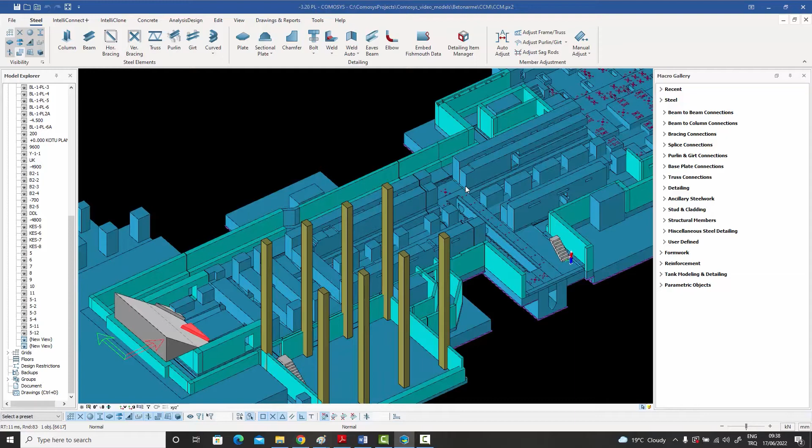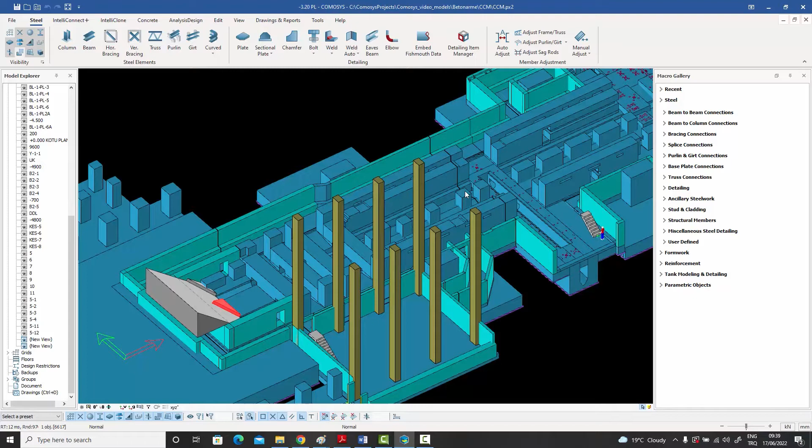This video is about an automatic dimensioning feature in COMOSYS for formwork or concrete structures. We have several commands for automatic dimensioning, but this particular command is for a controlled mechanism in which the user decides where the dimension lines will be.

Here I've created a plan view of the model with certain up-down limits, and my purpose is to create the formwork dimensions. We can create dimensions of all points in one go, but often we don't want that kind of automated dimensioning, because the people at the site might prefer the dimensioning done differently. There's a command in COMOSYS in the dimensions menu called formwork dimension along a line.

This command is useful because the user decides on a line along which they want the dimensioning to take place. The good thing is that this is not a one-time creation of dimensions. It becomes an automatic creation of dimensions every time the drawing is updated or reopened. Even if you go around and make changes in the model, when you come back into the drawing, the dimensions will be updated along the lines you had defined previously.

Under the edit menu, we have lots of different commands, but on the right hand side we have commands for creating points and shapes. Under the shapes menu, we can create lines, zigzag lines, polygons, rectangles, circles, ellipses, and elliptic arcs, for instance. What we need for this particular command is the ability to create these lines in the drawings.

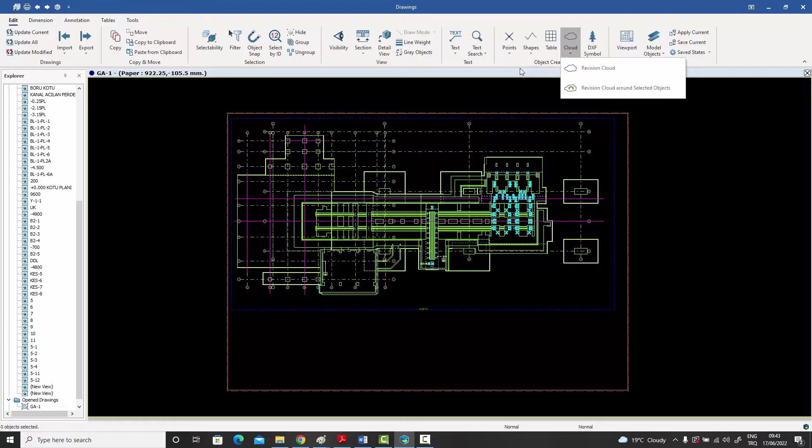But within this viewport, you can also create dimensions which don't come from the model, or write text, or make annotations which don't come from the model. Similarly, you can create shapes, or even a cloud, which don't come from the model. So there are two types of objects on the drawing side: model side objects and drawing side objects. These shapes I'm talking about are drawing side objects.

You can go ahead and create as many as you want, whether inside the viewports or outside. But right now we'll be talking about this line object. So let me go ahead and click that. This line, as can be understood intuitively, will ask us for two points.

If we can snap onto any two points, we can create a line. But if we want to snap to a free point somewhere, we need to press the Alt key, and then it snaps to that free point. Then let's say we want to snap to another free point, but ensure the line is horizontal and not slightly inclined. If you want a horizontal line, press the Control key. If you want a vertical line, press the Shift key.

Otherwise, you can just click anywhere and the line will be inclined depending on what points you choose. But if you want to ensure that even if you snap slightly incorrectly, the line is exactly horizontal, press the Control key. And if you want to create a vertical line, press the Shift key.

Right now, since I want a horizontal line, I need to press the Control key and the Alt key, because I'm going to snap to any arbitrary point, not a snappable point. So let's say I snap somewhere over here. I'll press the Control key and the Alt key, and if I click over here, automatically my line will be dropped to that point.

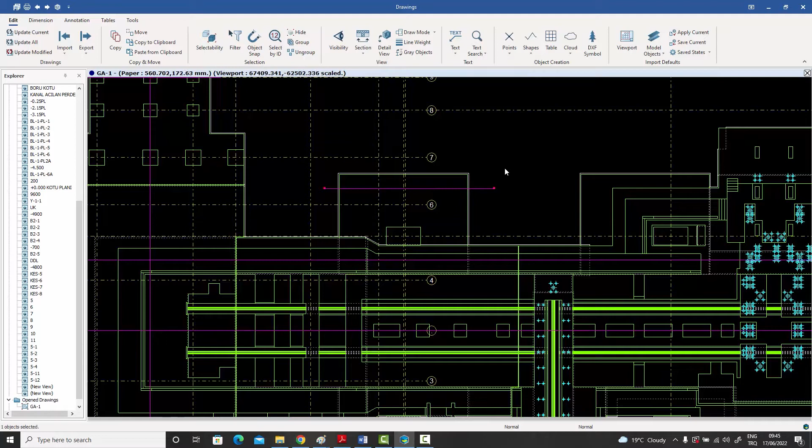I can continue selecting more points, but right now I'm just going to right click, and when I do, this line appears. You can double click on this line and give it start and end offsets if you want. You can change the colors, the line styles, etc.

I've already created a few lines before opening up this drawing for you. Some lines over here, some lines over here, some lines over here.

What you can also do is copy these lines around. So if I select this line and just start dragging it, it's going to basically move it. But if I select it and press the Control key down while dragging it, then it's going to actually make a copy of that line. So I can keep the control key pressed and drag it down and make a copy of that.

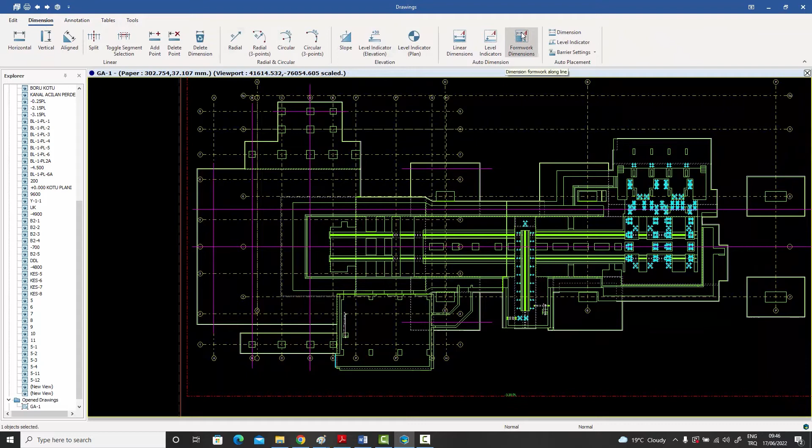Now, the command which I want to show you is in the dimensions menu, and this is the one over here. What this will do is dimension the formwork along a line. So how does this command work? Well, it works very simply. All you need to do is select the lines which you want to dimension.

I can press control and keep selecting all the lines which I want to dimension. So I'm going to select this one, this one, this one over here. Also these two horizontal lines which are going all throughout the structure all the way till the end. And let's say this line as well.

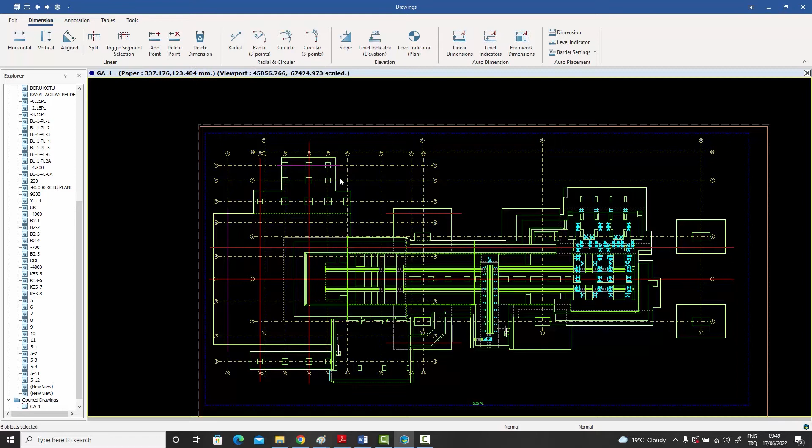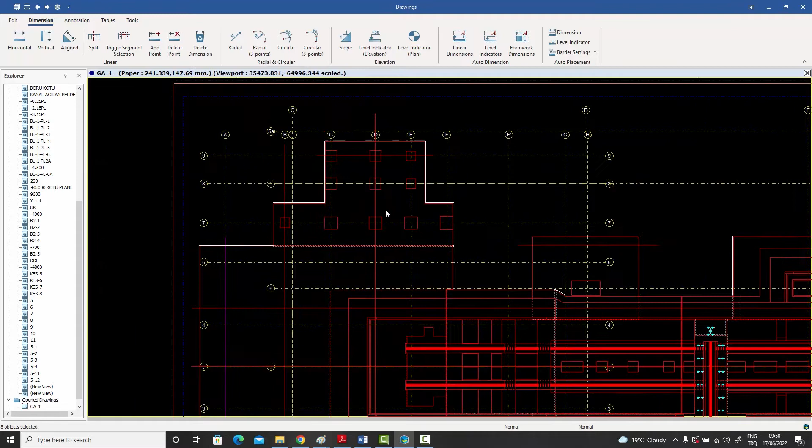After having selected my lines, I also need to select the formwork object which needs to be dimensioned. Right now this has been unioned, this entire thing has been unioned. Although on the model side these are all separate objects, on the drawing side they have been unioned into one object. So I'm going to select this formwork object as well, and as you can see, the whole thing lights up. The entire structure lights up, which has been unioned on this side.

After having selected my lines and my formwork, I basically just press this button, which is the dimension formwork along a line button. And when I do that, it creates these dimensions.

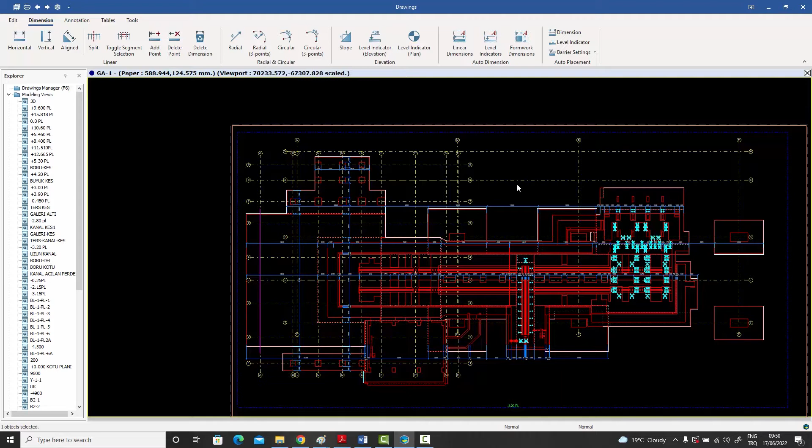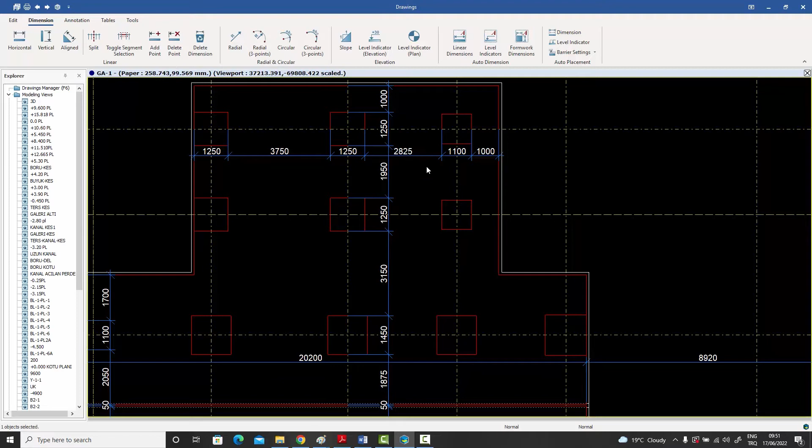The first thing it does is delete the lines which we selected, because those were temporary objects. Instead of those lines, it will go in there and create an intersection of that line with the formwork object wherever it intersects. So this one was going through this over here, so it intersected at this point, at this point, at this point, at this point over here. It basically creates all the dimensions we want along that line.

The good thing about this command is that these are not just dummy dimensions which have been created, but these dimensions will now update as you modify the model. The reason how that happens is if you go inside and see the macro, you see that there's a formwork dimension macro inside right now.

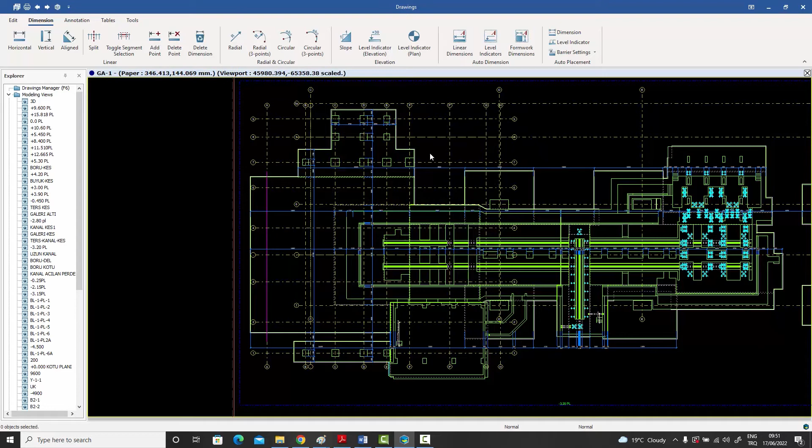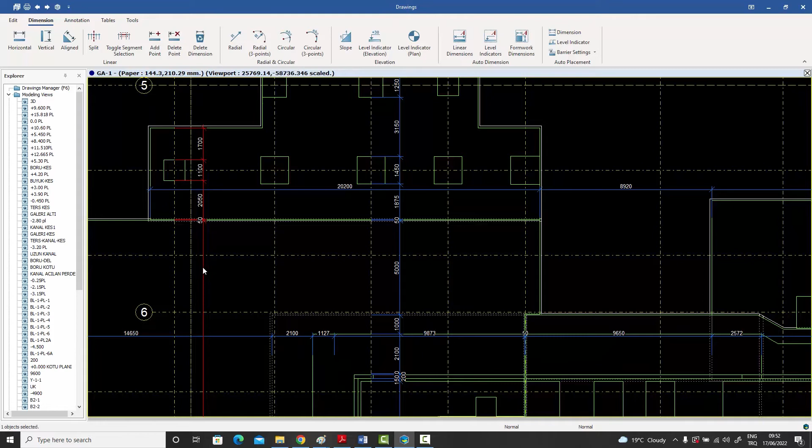This macro will now run every time this model is opened. It has saved away those lines in its memory, and every time you open this drawing, it will recreate these dimensions intelligently. So let's say if I were to go back into my model and create another pillar over here, then this dimension, which was running along that line, will now include those new dimensions as well. If I make a new hole over here, for example, then this dimension will include the dimensions of that hole as well.

This is a very powerful way of working, the advantage of this command is that you set up the whole thing yourself. You decide the dimensioning rules, where and how you want this complicated concrete formwork block to be dimensioned. Once you've made those decisions by inserting lines at different points, you just select those lines and the formwork, press this button, and the dimensions are created for you. The beauty of this is that it will keep updating.

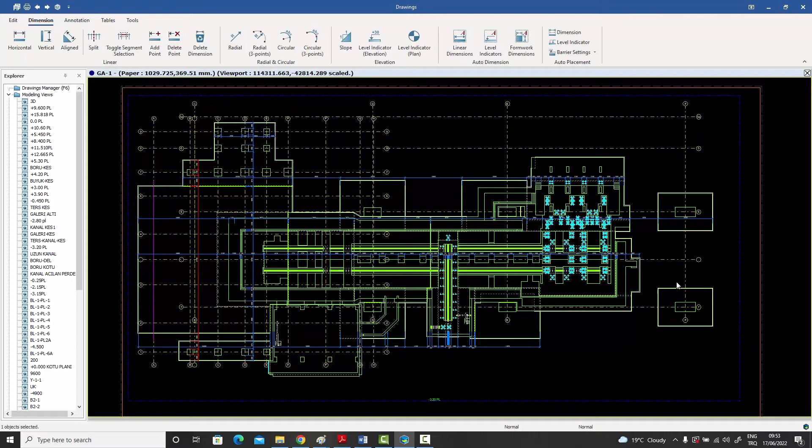If I were to go in and create a horizontal dimension myself manually, like that, this dimension is just a dummy dimension. It won't be updated if anything happens to this model. Let's say I create an indentation or a cut over here. The next time I open this, you won't see the dimensions of the cut, you'll need to add those points yourself. Or if the cut moves to a new location, the dimension will still show the old location.

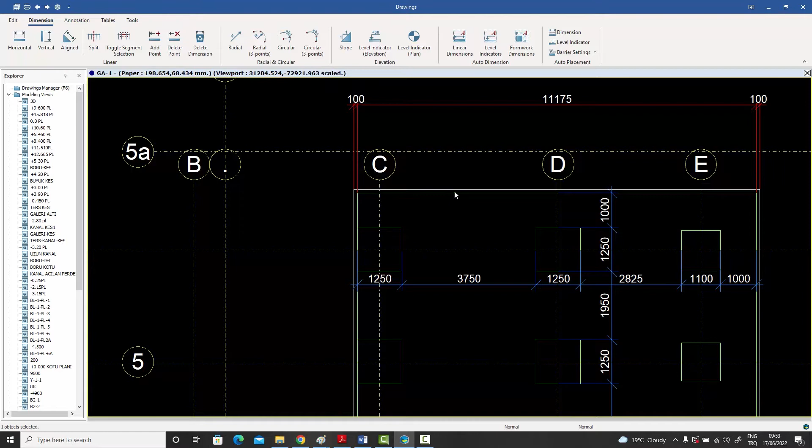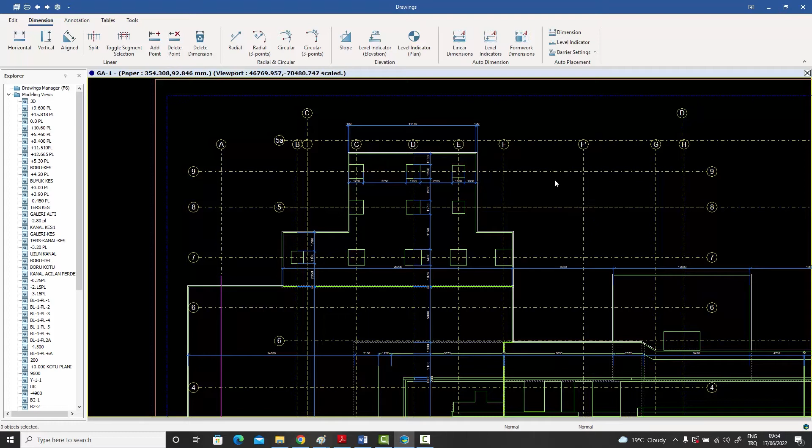But if you create those dimensions using the formwork dimensioning along a line command, that becomes a different story, because it gets turned into a macro along that line. The advantage is that if you create a new cut, move an existing cut, or add a column or beam that modifies dimensions along that line, every time you open the drawing, your drawing will update automatically.

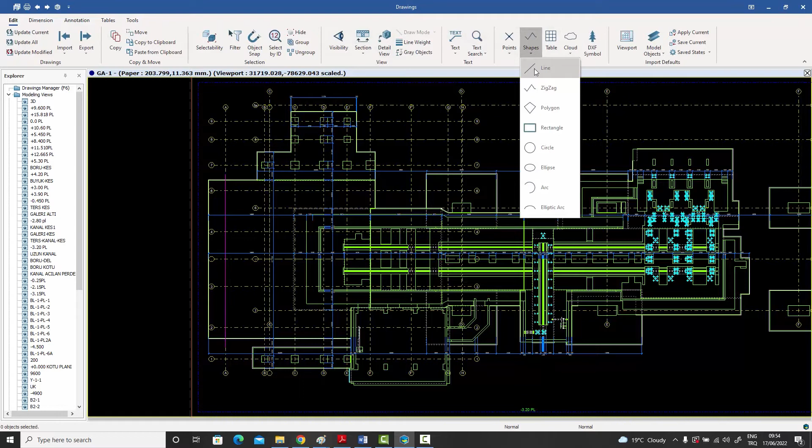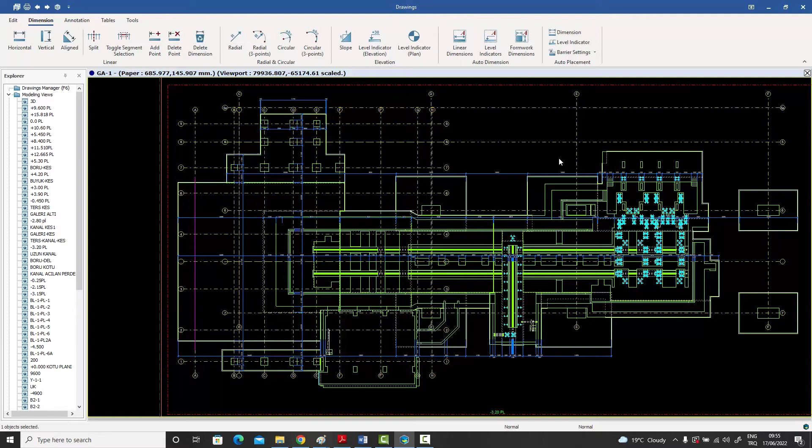It's highly recommended that when doing complicated concrete work like this, instead of creating dimensions manually by hand, you always go to your edit menu, your shapes, create all these lines along your formwork, then select them along with your formwork object, go to your dimensions menu, and press this button - now your drawing will start behaving intelligently. This is a very powerful command everybody should use in COMOSYS, and it will really quicken your concrete formwork general arrangement drawing work.

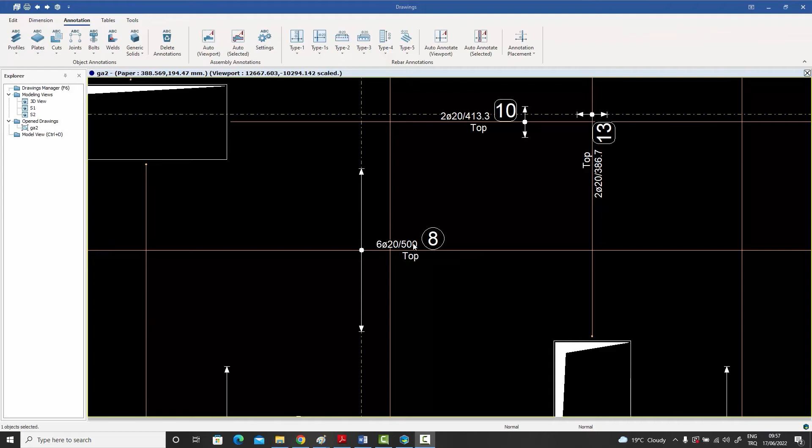Now this command which automatically dimensions formwork along a line has another interesting feature I want to talk about. Over here I have some rebars in this plan view, and this is the way you'd normally go about dimensioning or annotating the rebars - showing the range, the number of rebars, their diameters and spacings. But sometimes in certain projects with particular requirements, they want the dimension of each and every rebar given in a different way, one by one.

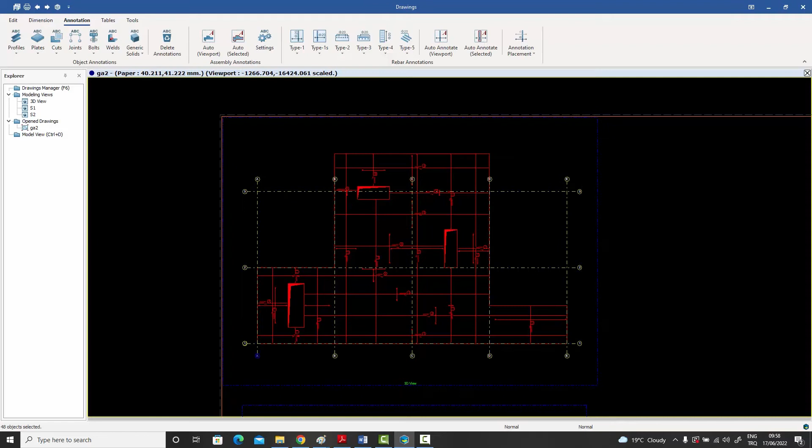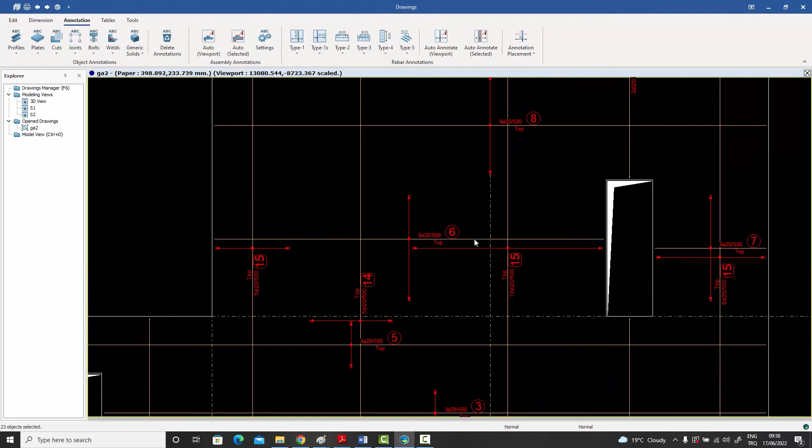So to do that, let's first delete these existing annotations of the rebars. All I need to do is select everything and press enter. This is on-the-fly filtering, which is extremely powerful in COMOSYS - look at these objects, I'm looking for the text objects. When I select the text objects, it says your text objects are all rebar annotations, so let me double click on them. As you can see, the rebar annotations have been selected from among this jungle of everything else, and I press delete - it comes back to its original shape, the way it was imported from the model.

Now let's see how we can use the dimension the formwork along a line command to help us with dimensioning both the formwork as well as the rebars. So let's create our lines first.

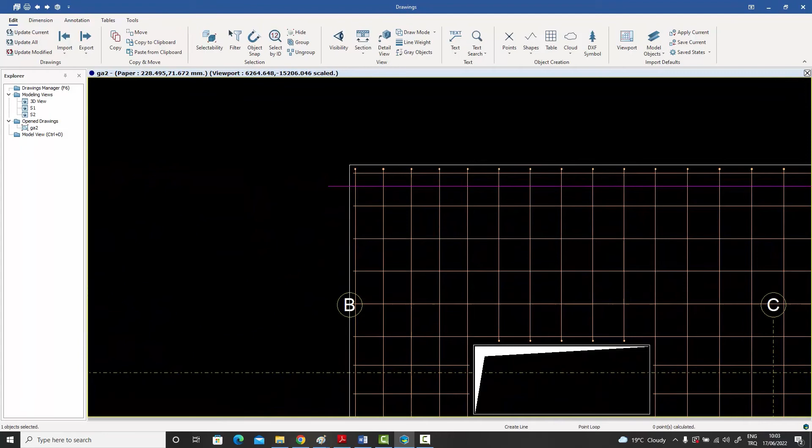Let me go to my shape and lines, and let me zoom in, and press the Alt key to snap to any free point. Go to the other side, press Control and Alt to ensure it's a horizontal line, and leave that. Then I can press the Alt key over here and go all the way down. Now press Shift and Alt to ensure it's a vertical line, and leave that. Similarly, press the Alt key over here and press Control. Let's go to the other side, press Control Alt to ensure it's a horizontal line, and leave it like that.

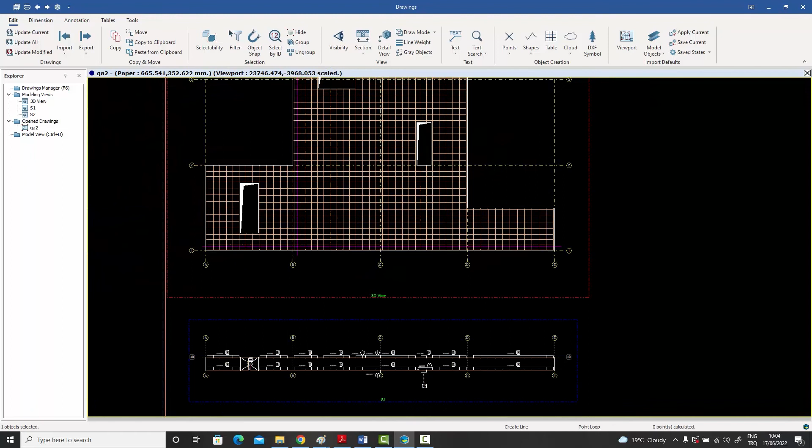I've created 3 lines, and let me now select the whole thing, because I want to select the formwork as well as the lines as well as the rebars, wherever these lines are intersecting with the rebars. I've just created 3. I could have created more depending on my need.

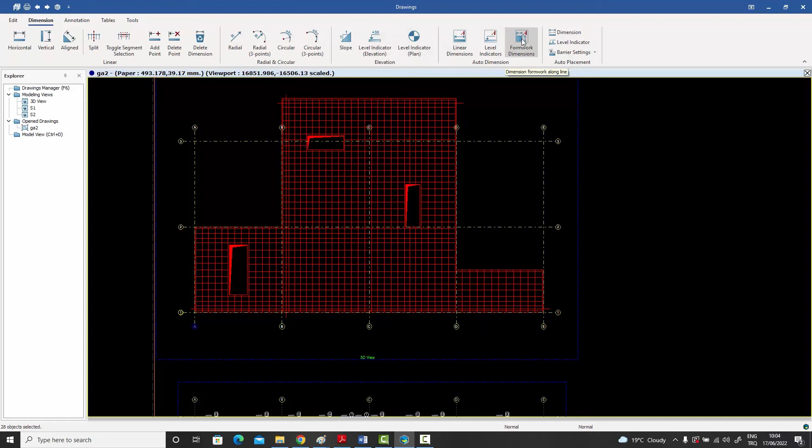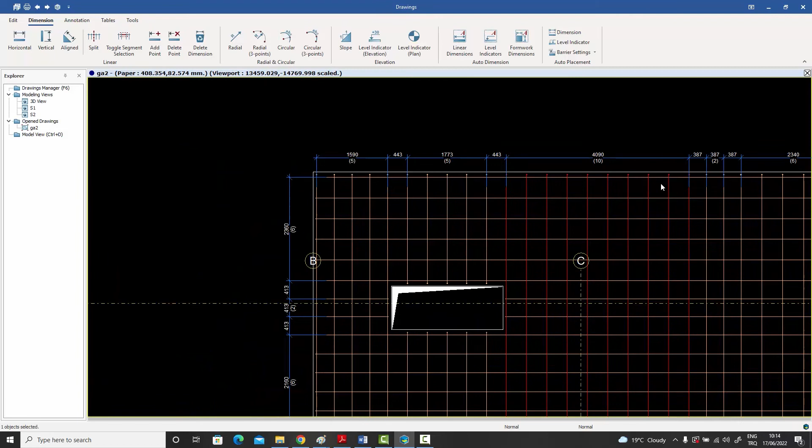Now I'm going to go to my dimension menu, get back to this one, and just press it. When we do that, let's zoom in, we will see that it has dimensioned the rebars very intelligently. So this was the first group over here, then there's another one from here to here, another from here to here, then another from here with 2 bars, and then this last piece of 6 bars.

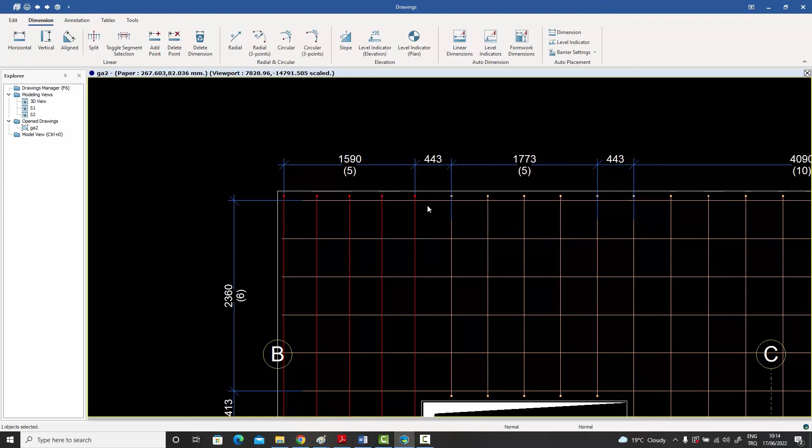So what it has done is it has dimensioned these first 5 bars. It's written that the number is 5, and the distance from this end to this end is 1590. Then there is a gap of 443, and then there's another 5 bars with a total distance of 1773.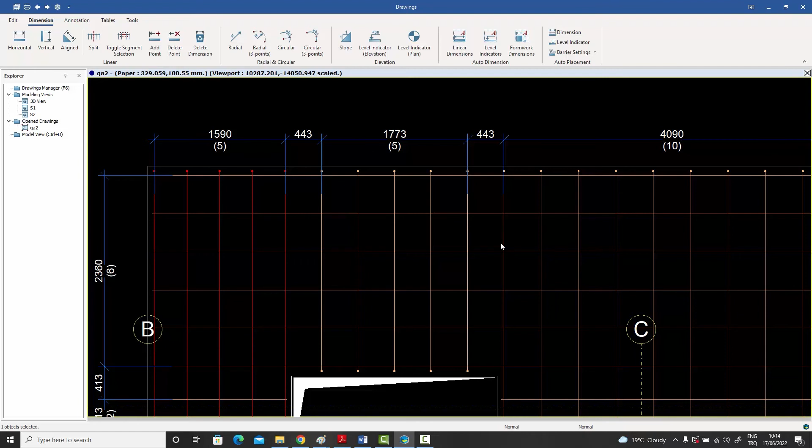These kinds of requirements are when the site actually wants exact dimensions of where it will start and where it will end. So they don't want only these ranges, the ones we saw in the beginning of this video, but they want each and every set to be dimensioned on the formwork so that they can start placing the rebars at the exact locations.

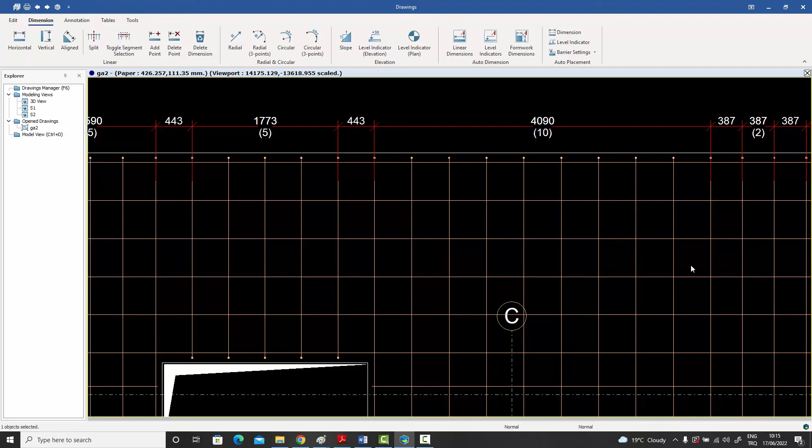And then this one, for example, has 10 rebars with a total distance of 4090. Now, as you know, when we normally place these rebars, we can have several options, because you can never have an exact spacing, since the distance the bar needs to cover might not be an exact multiple of that spacing. So if your spacing is 200 but the distance is 990, there's no way you can divide 990 by 200 and get an exact number.

So what the program will do is offer you several options: you can either have the same spacing everywhere but slightly less than the guideline spacing of 200, or you can have the first and last spacing different but everything else at 200. So those options are there.

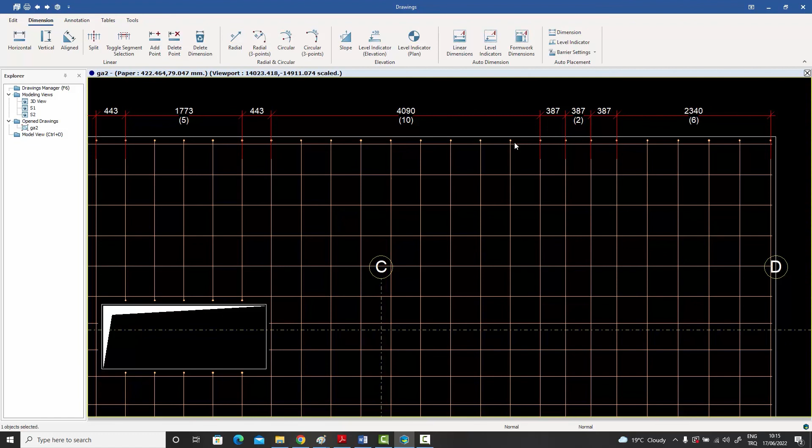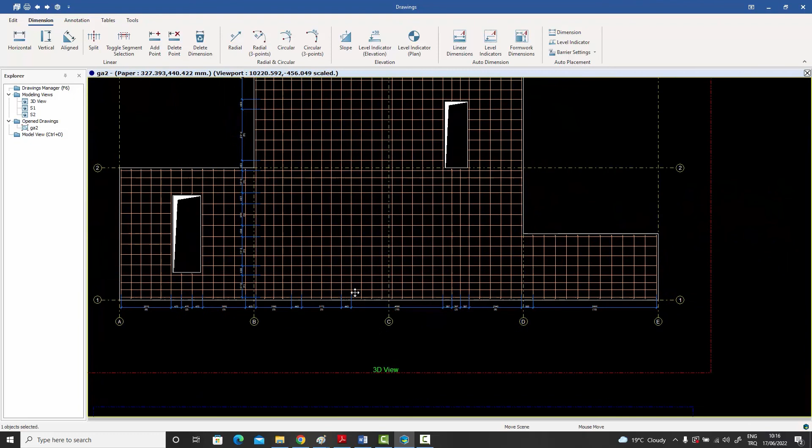But what this command will do for you is create these exact dimensions, give you the spacings, give you the number of bars, the spacings once again, and once again on this side as well. So very quickly you'll be able to dimension your rebars, just like you can dimension your formwork, using the same dimension along a line command, which really makes your work a lot easier if you want this kind of dimensioning.

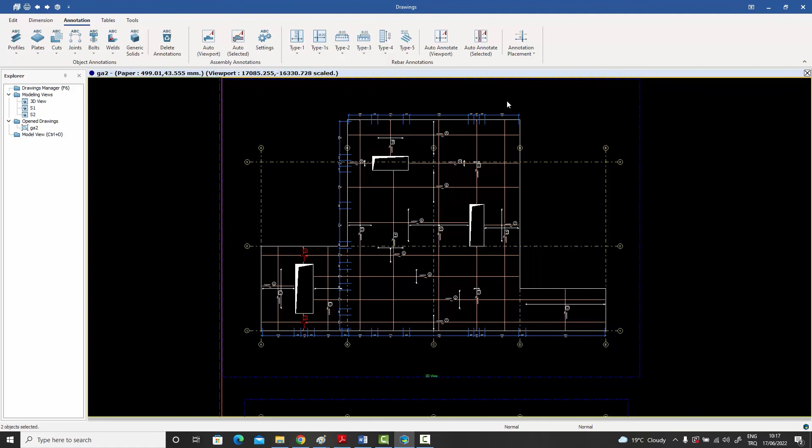Like I said, in a lot of cases you might actually be doing the other kind of dimensioning, where you basically give your ranges, and that's also possible. Of course, if you wanted, you could create a combination of the two — both that kind of range dimensioning as well as these dimensions on the side — and that would be an even more flexible way of doing things.